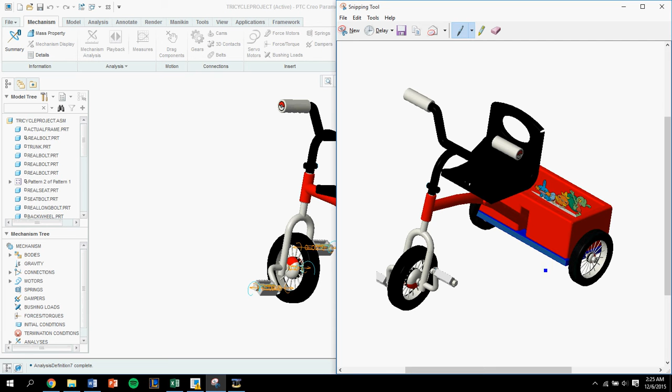You can tell that this is clearly a Pokemon designed tricycle based on the Pokemon logo on the back, the picture of Pikachu, the Pokeballs on the grip handle as well as the center of the wheel, and some extra stickers of Pokemon inside the trunk.

We also wanted to make an adjustable seat to appeal to kids of all sizes, as well as a backrest for maximum comfort. We've also added a trunk, which adds extra convenience so the rider can put his or her items away while riding the bike.

The materials are all plastic except for the frame and the head tube for maximum sturdiness, the grip handles, which are made of rubber, and the nuts and the bolts, which are also made of steel.

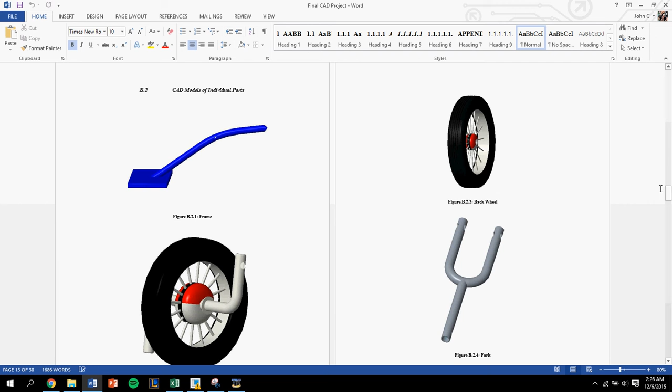Now we're just going to do a quick run through of the components that make up this tricycle. First off, we have the frame, which is a pretty standard design. All the components bolt onto this. Here we have the front wheel and crank assembly, which we decided to make one component. There's holes in the crank for the pedals to fit into.

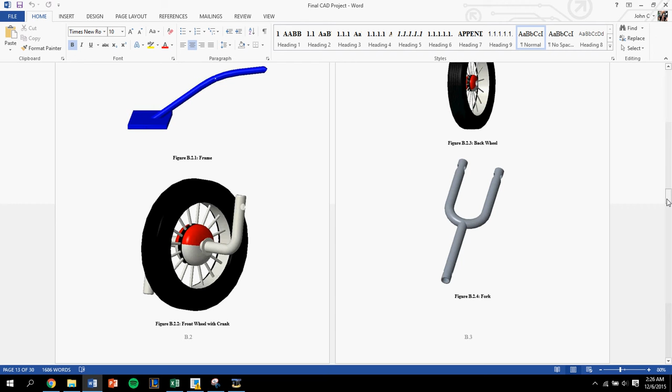This component has a close running fit, an H8/F7 fit to be specific, which means that it's a fairly tight tolerance, but the wheel can still run freely. It is a wheel, so it needs to be able to turn, but it can't wobble. Otherwise, the ride would be very unsettling.

The back wheel is very similar to the front wheel. It has the same sort of tolerance, but this time it's a shaft basis, which means that now it's an F8/H7 fit. The fork has two holes at the bottom for the front wheel to rest in, and there's also a hole in the top to attach to the handlebar assembly.

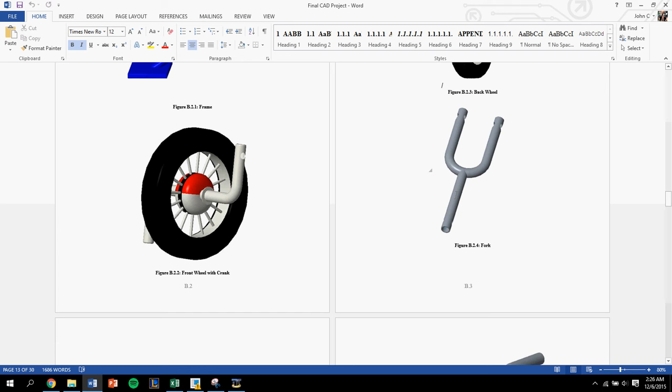This component has a sliding fit, a G7/H6 fit, which is a slightly tighter tolerance than either the front wheel or the back wheel, because the fork is only turning when the rider is steering, but it does still need to be a tight tolerance.

The grip handle is made of rubber and has indentations for the rider's fingers to fit into. The handlebar is a fairly standard design. It has a hole here to attach to the fork. The fork bolts on. And this component has one of the tightest tolerances of any of the components, an N7/H6 fit, because the handlebar shouldn't be moving at all. If it moves or comes off during the ride, it would be a huge problem.

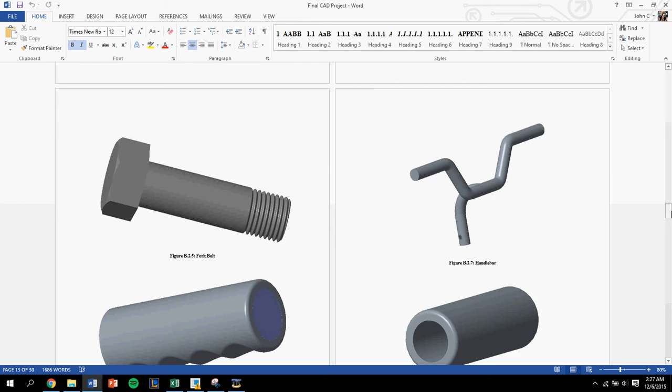The pedal here has nice little lightning bolts. It's the exact same tolerance as the rear wheel, an F8/H7 fit, because again, it still needs to turn freely, but it can't wobble too much.

We have the seat here, which has the backrest for increased comfort and two holes that allow for adjustment. The seat has a locational clearance fit, an H7/H6 fit, which is important because the seat has to be tight into the frame. Like the handlebars, it can't move during the ride, but it does still need to be able to move for adjustment.

And lastly, we have the trunk, which has an indentation here allowing for the tube from the frame. If this indentation weren't here, we wouldn't be able to place the trunk on the back of the frame, and obviously it allows the rider to carry their stuff.

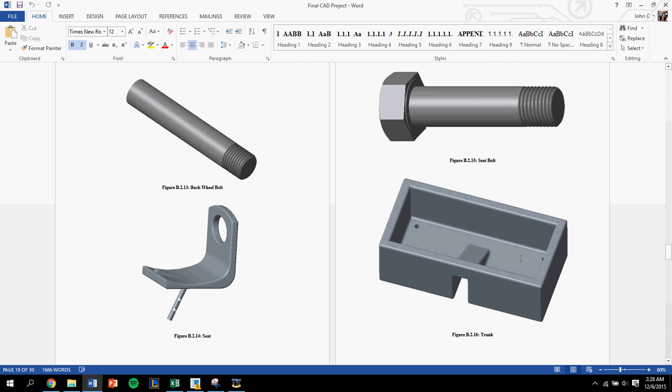Now we will simulate the tricycle in motion. As you can see, all the wheels are rotating simultaneously and at the same pace, but the pedals are staying in the same location as the crank rotates to emulate a foot being stepped on it, which shows that all our components work perfectly.